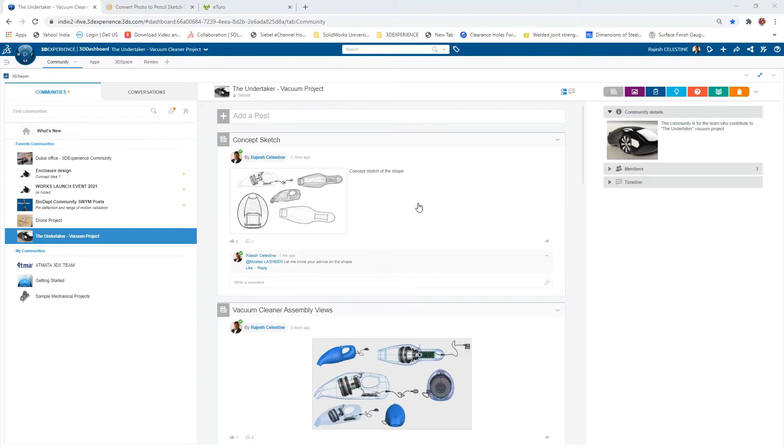Let's see how. Collaboration starts on the 3DEXPERIENCE platform, where I have a dedicated space for collaborating with my projects, my files, and my team. I can also launch SOLIDWORKS from within the platform, so there's no need to use the desktop icon to open SOLIDWORKS. As SOLIDWORKS is integrated with the 3DEXPERIENCE platform, you can directly launch it from within it.

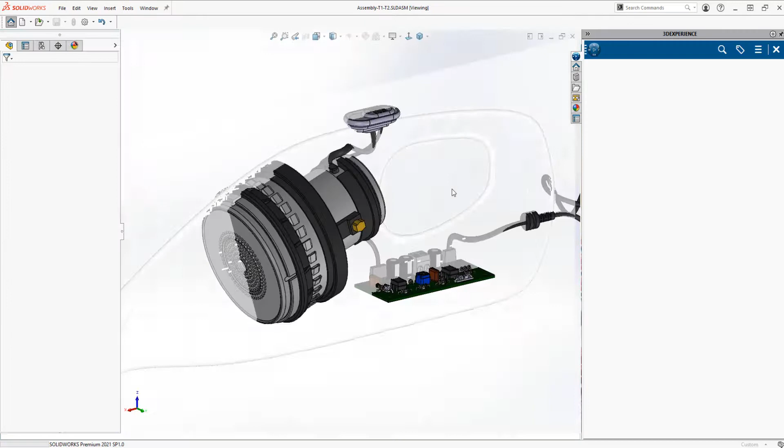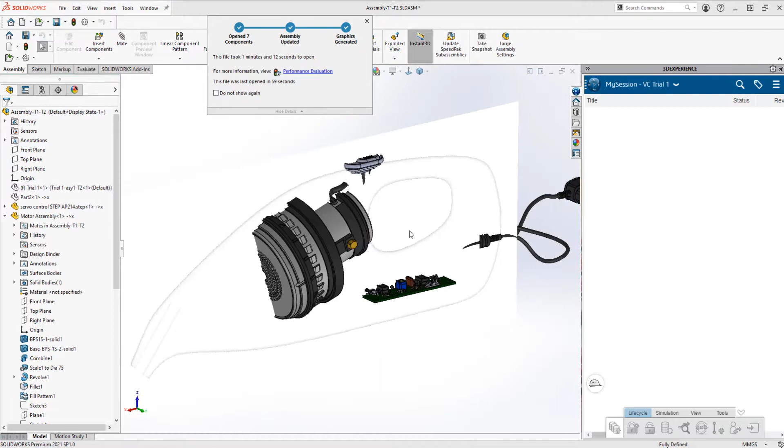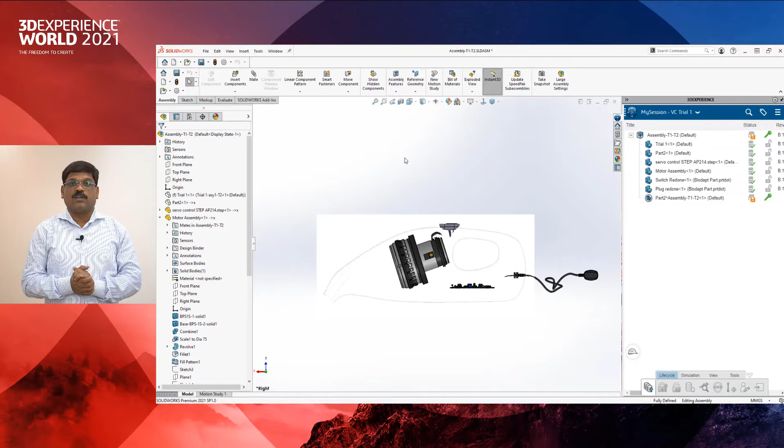We used SOLIDWORKS here as the accessories for the vacuum cleaner were native SOLIDWORKS files. You have a user login ID and password to log onto the 3DEXPERIENCE platform, with a dedicated space to save your files. Every versioning, revisioning, and stage of the design, including ownership, is tracked behind the scenes on the platform. As you can see, I have a sketch which helped me create my layout. This shows seamless integration between SOLIDWORKS and the 3DEXPERIENCE platform.

We have created the concept design and concept sketches, and done the layout of accessories required for the vacuum cleaner. Now it's time to shape our product. As SOLIDWORKS users, surface modeling was really a tedious task, and it was quite difficult to create organic shapes with conventional surface modeling tools. Now, on the 3DEXPERIENCE platform, you have the xShape app to work with sub-D modeling concepts.

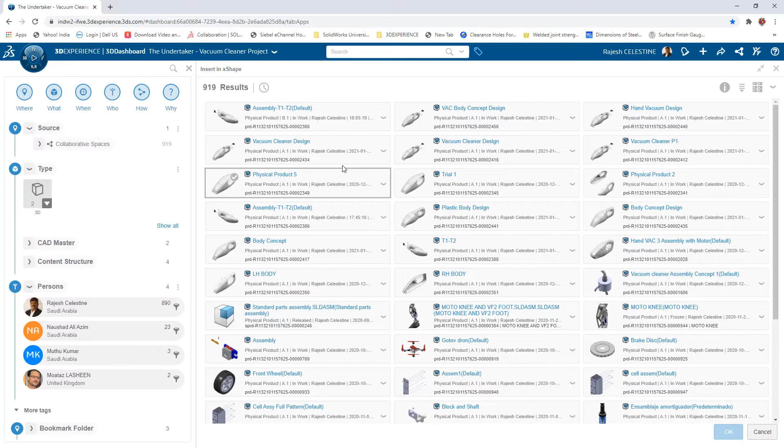Let's see how. First, I start by creating my file, clicking the new component for the vacuum design and putting it in my collaborative space. Then I insert my SOLIDWORKS design layout from my collaborative space into xShape. This is possible because SOLIDWORKS has seamless integration with the 3DEXPERIENCE platform.

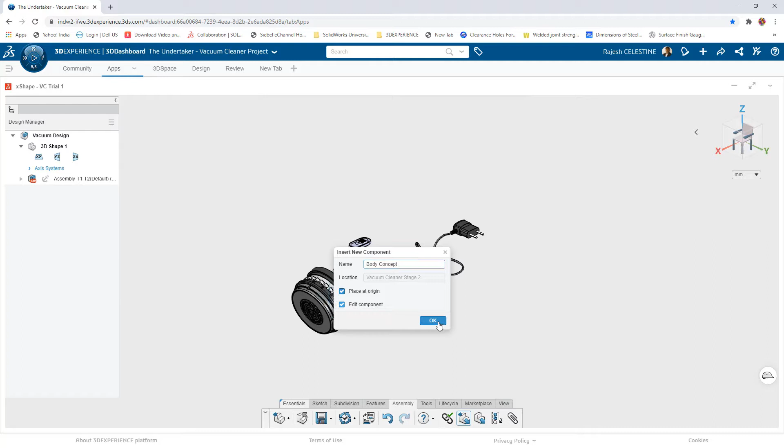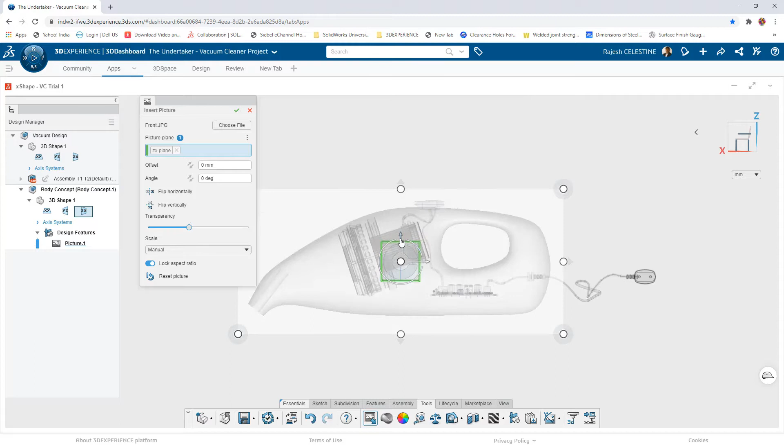The next step is to create a new component at the origin within xShape. Next, I insert my concept sketches, as we usually do with SOLIDWORKS, which will be the reference for shaping my primitive. After inserting the sketch picture, I can change the transparency, adjust, resize, and position it to suit my component layout. This can be done manually or by specifying a distance. Two sketches are sufficient for this design, the front and the top.

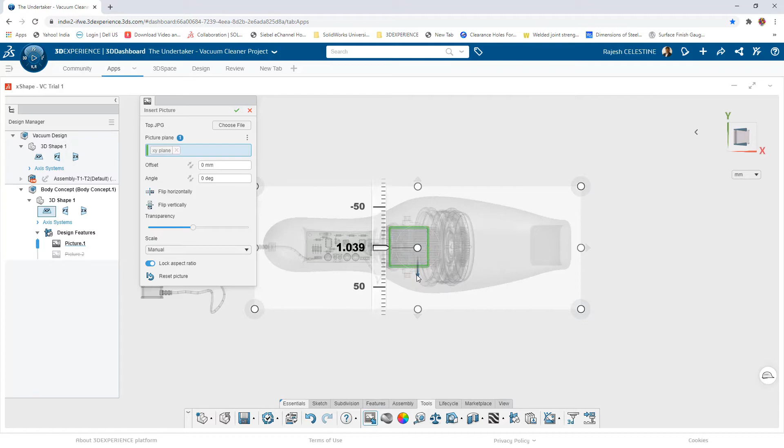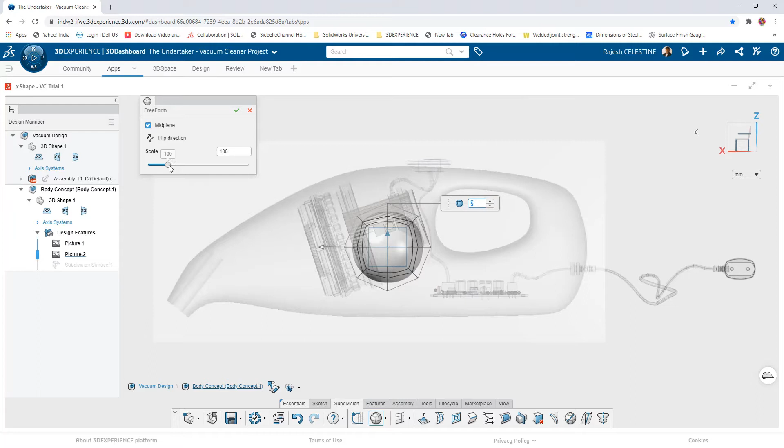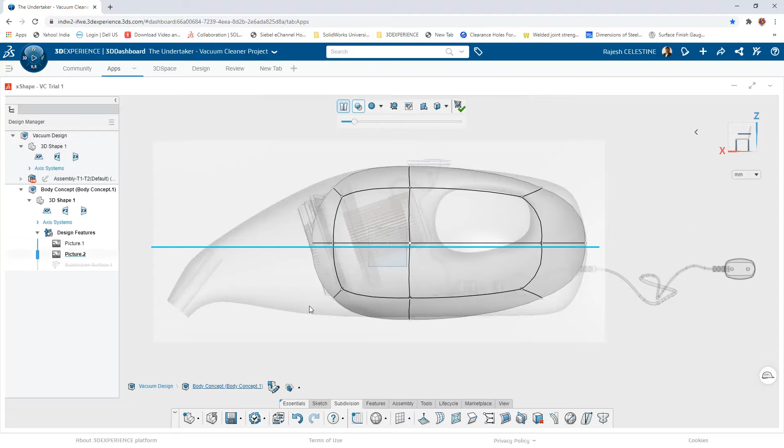In xShape, everything starts with a primitive. From a host of 3D primitives provided within xShape, you can choose the one that best suits your design. For this design, I would choose a quad ball to get started. You can refine your shape by adjusting the number of divisions and dragging the on-screen handles to refine its initial size. xShape preserves curvature continuity across the entire shape, eliminating traditional methods required to solve these challenges. Changing the transparency of the primitive aids in getting a clear view of the sketch.

Additional loops can be inserted and deleted to refine your shape and have greater control on shaping your geometry. You can refine your design through a variety of methods, the simplest of which is to select any number of vertices from the shape and then use the on-screen triad to adjust their position.

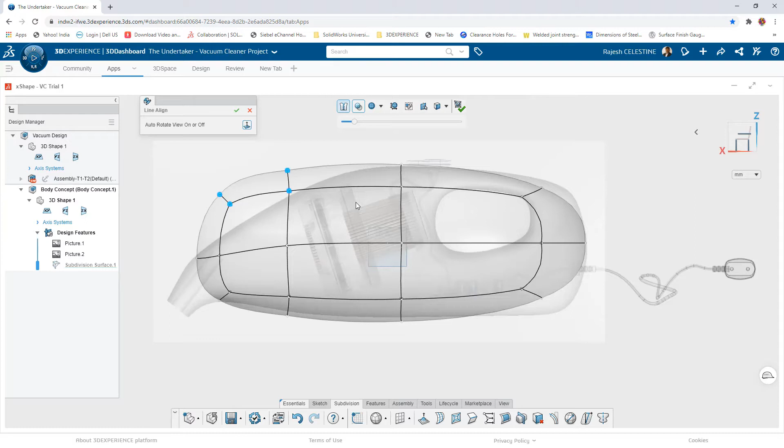Refining your shape can be done by selecting vertices, edges, loops, and faces individually or in groups. The triad, known as the robot, helps you move, rotate, and scale in all 3 directions.

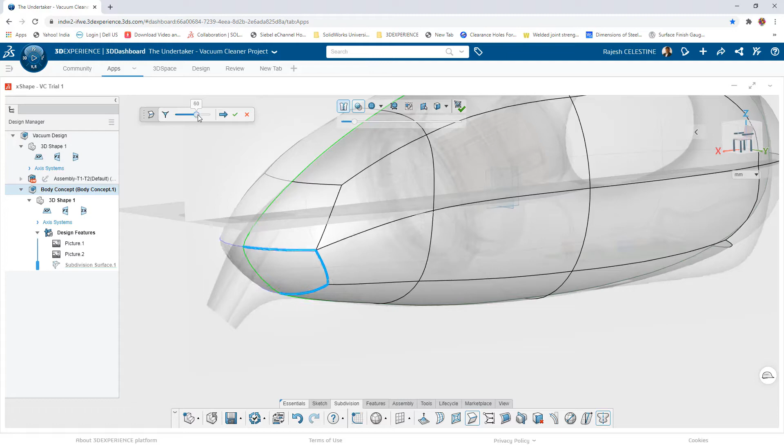Powerful tools like symmetry enable you to define and preserve symmetry across the specified plane. This simplifies the design process by allowing you to focus on one half of your model while ensuring that those changes are preserved on the other half.

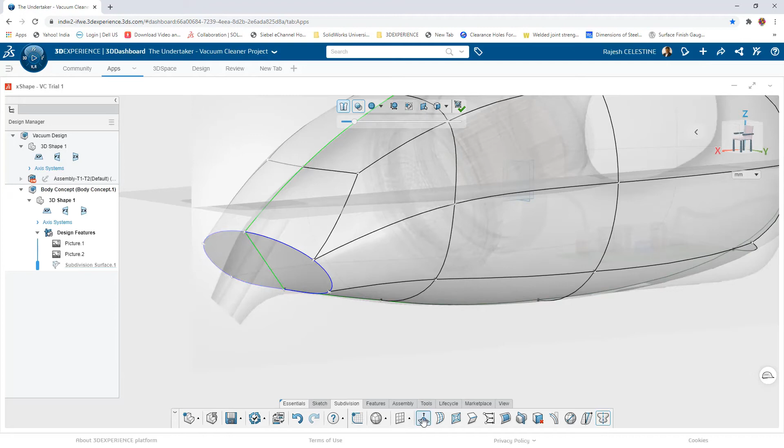The crease feature aids in creating sharp edges where the percentage of sharpness can be adjusted. By selecting a group of vertices, you can choose specific tools suggested by xShape to be applied on your selections. After completing your geometry, you could refine the existing vertices to suit the shape visually.

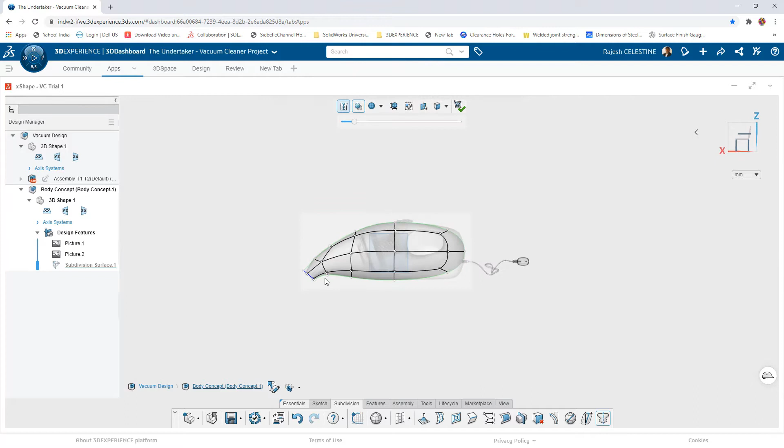Dragging the entities onto the sketch completes my profile on the portion of the suction mouth. Refining my model helps me to complete the portion on the suction mouth. Now having completed the portion of my suction mouth, I would like to refine my geometry on the portion of the handle.

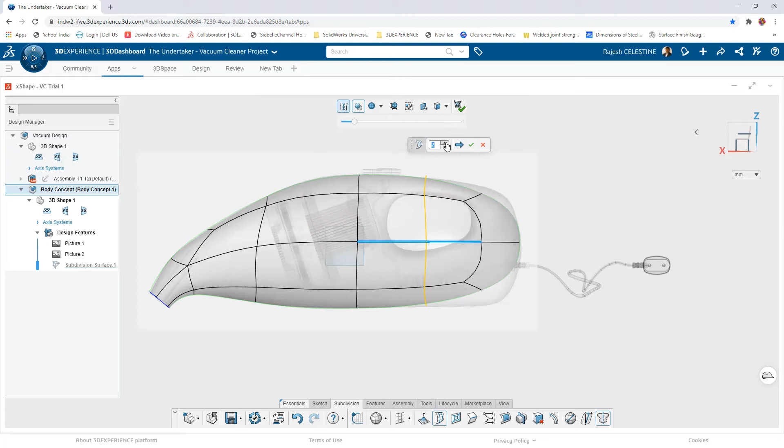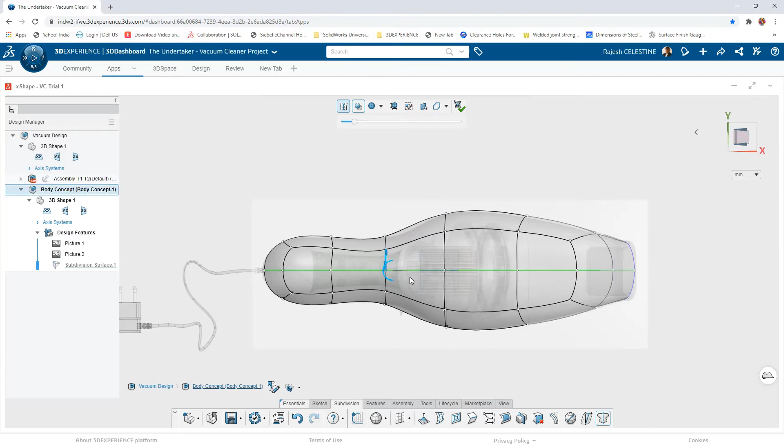Before this, to refine my geometry, I would like to add additional loops and position them in the top view. Just by selecting your vertices and dragging them, and using your filters where you can select edges, loops and vertices, you can position them to get a refined geometry.

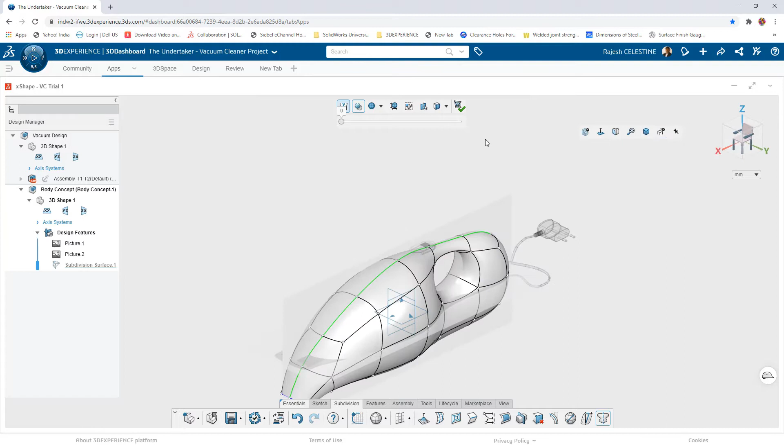Selecting opposite faces and applying the extrude command removes material from the geometry. Once removing material, it's time to refine the portion of my handle where I could insert additional loops, which gives me greater control to refine the geometry.

Having completed this, it now makes it easier for me to shape my vertices to align the shape of the handle and complete my design.

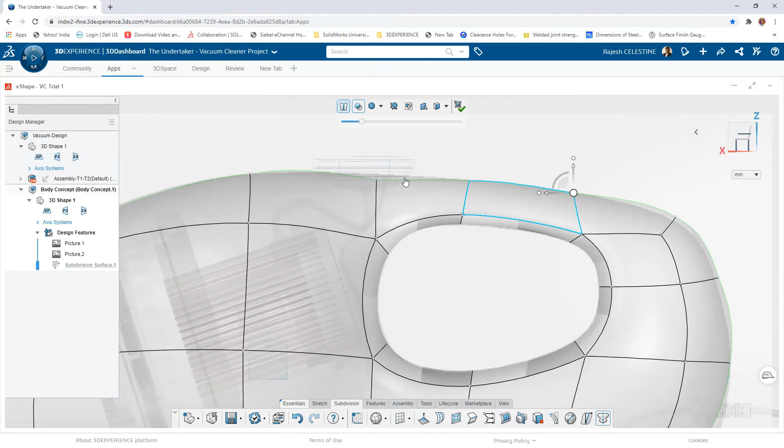Here it is needed to align the bottom vertices as I require them aligned to a line. Selecting the bottom vertices and choosing the line align option helps me achieve this.

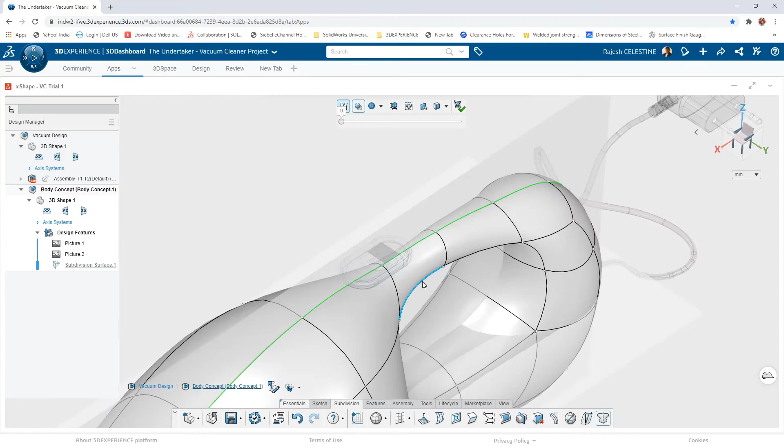A portion of my handle needs to be stretched, where I could select the edge and move it with the triad.

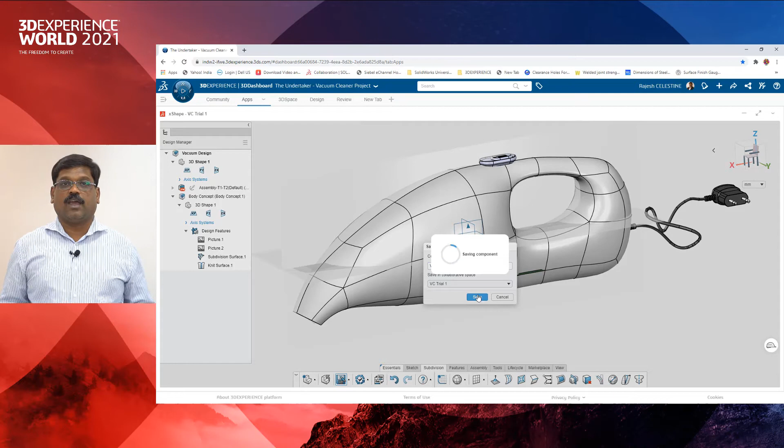So once I've completed my design, it's time to save it to the collaborative space. What we saw here is that xShape is a powerful way of creating complex shapes on the 3DEXPERIENCE platform.

So having created my design, I would like to check for surface continuity and draft analysis. Let me check if I have the necessary drafts, and also whether my assembly is free of interference. So I am going to run an interference detection check. Let's see how it works.

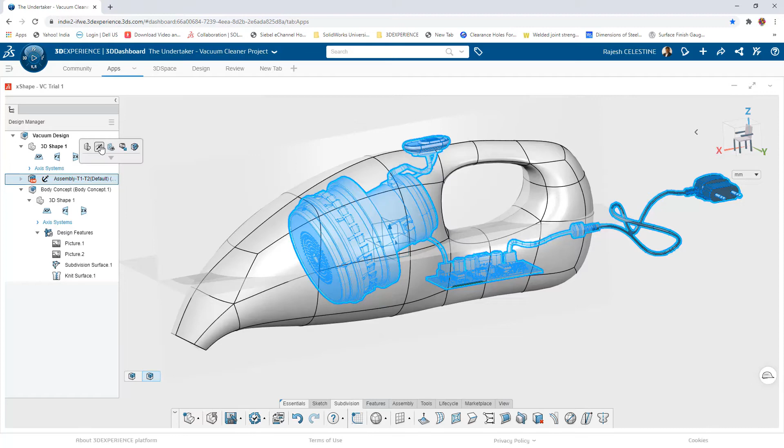Let's start with checking the surface continuity of my geometry. Surface continuity can be analyzed with the zebra stripes feature, just like in SOLIDWORKS. Switching between different views by clicking the view cube gives me a clear visual insight on the surfaces.

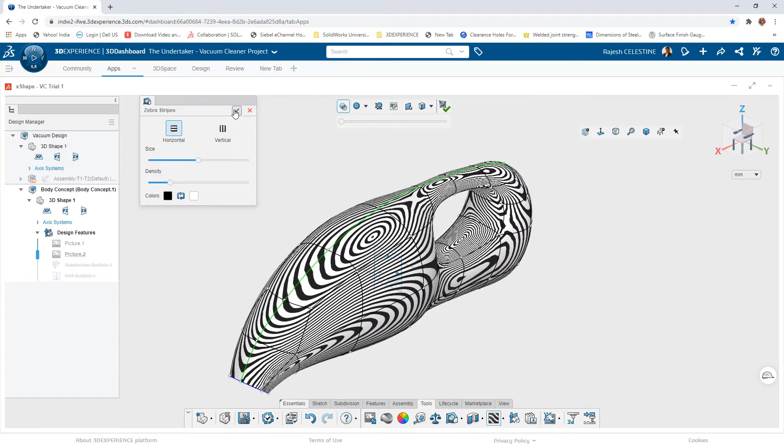Now it's time for me to check the flat faces on this plastic part. Here it is needed to have a draft of 1 degree. The draft analysis feature, similar to SOLIDWORKS, enables me to achieve this. Having my draft analysis active identifies faces that have positive and negative draft, as well as flat faces.

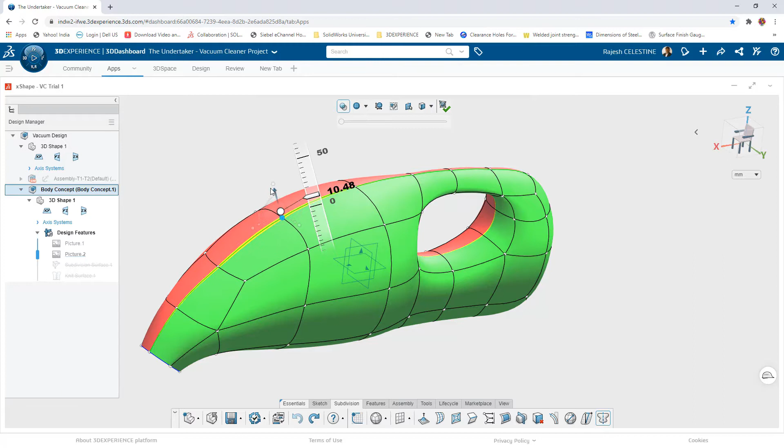The faces colored yellow require draft. I start by editing my subd model and dragging the necessary vertices as required. Now my model is free from flat faces.

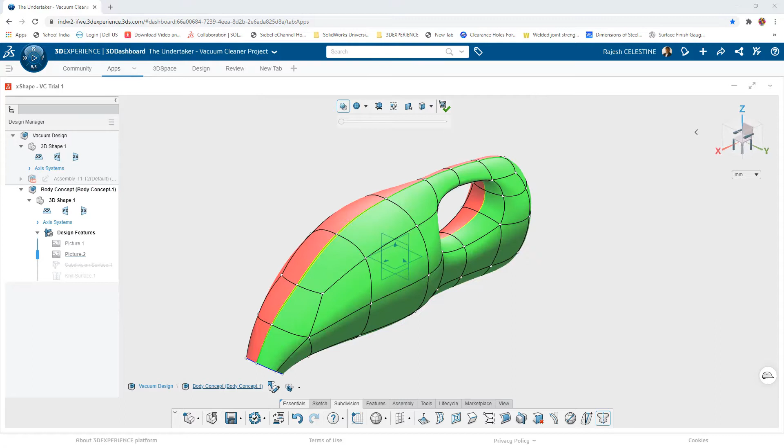Before running an interference detection on my assembly, I would need to shell my geometry. I will be applying the shell feature from within the xDesign app.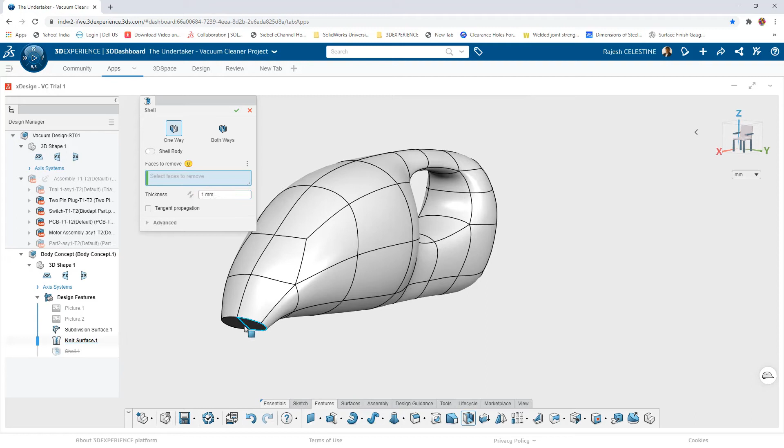Switching between apps is flexible on the 3DEXPERIENCE platform. I click Features, select the shell feature. As with SolidWorks, I select the faces to be removed and define a wall thickness of 1 mm. And it's done.

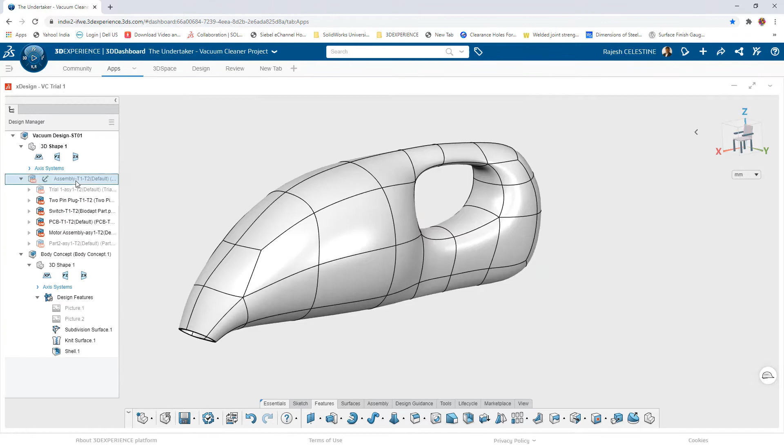After my shelling is complete, next I will proceed to check for interferences in the assembly. I will first activate the top level of the assembly and then run the interference detection tool. Selecting bodies in scope and hitting the calculate button shows me the interferences of bodies in the assembly.

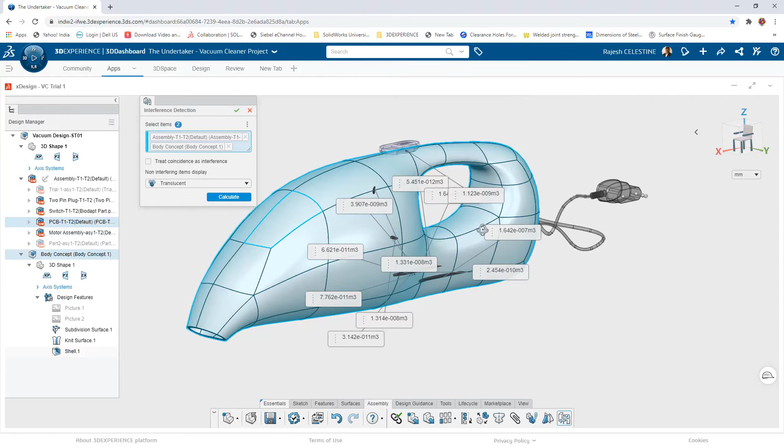I see the interferences between the PCB and the body, which is a matter of concern. The edge of the shape requires to be moved.

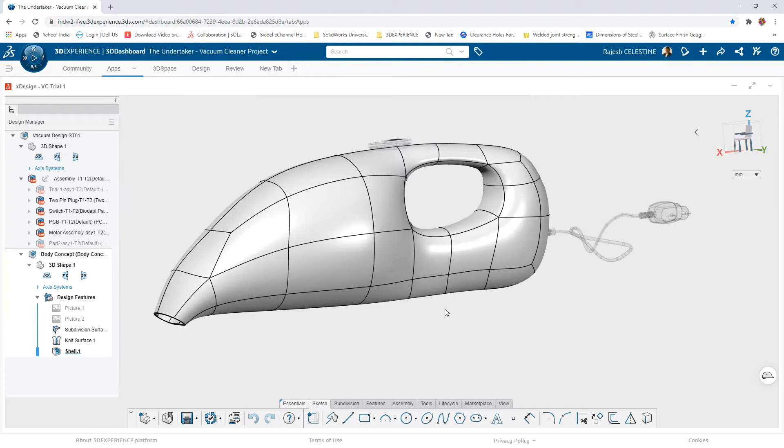Picking the geometry and selecting edit part activates the part. Next, clicking on the face again gives me a smooth transition into xShape. Now with the help of the triad, I can move the edge to make it free from interfering with the circuit board.

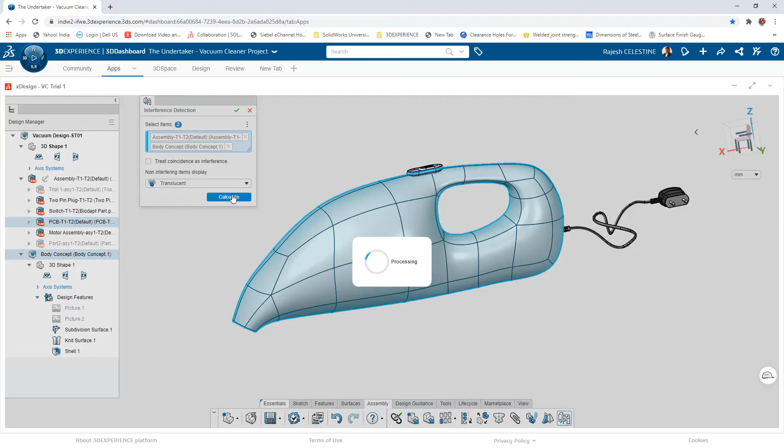After completing my editing with the shape, I can again run my interference detection by selecting bodies in scope and hitting the calculate button. Now I see the assembly is free from interferences. The interference shown can be ignored as it is to do with the wire.

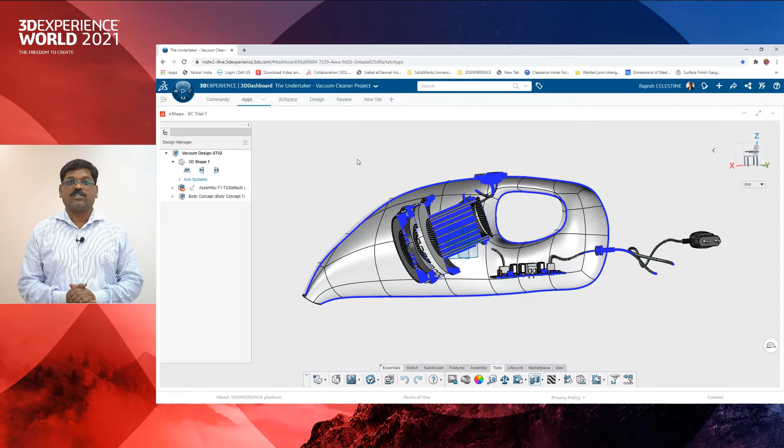I can apply a temporary section view, as we have with SolidWorks, to view or visualize the internal components of my assembly. What we saw here is validation tools such as zebra analysis, draft analysis, and interference detection, which are powerful tools on the 3DEXPERIENCE platform to validate your design prior to manufacturing.

3DEXPERIENCE takes care of the files created in their native formats, whether xShape or xDesign. To complete my design, I will need to add additional features to the plastic part. So here I am going to add some bosses to connect the parts. After adding my bosses, I am going to split my bodies using the multi-body technique.

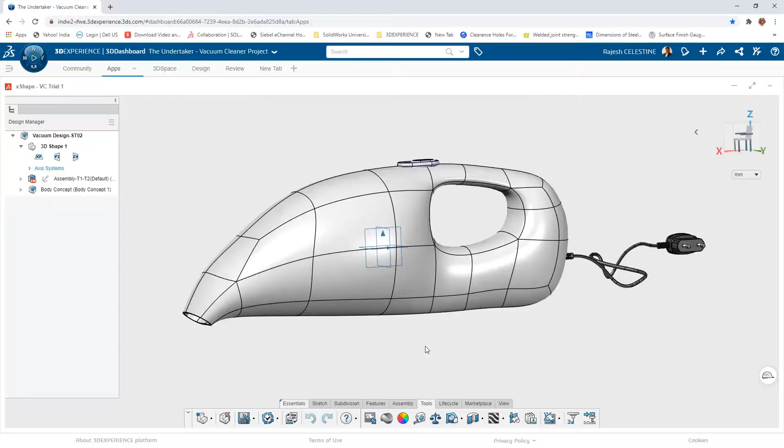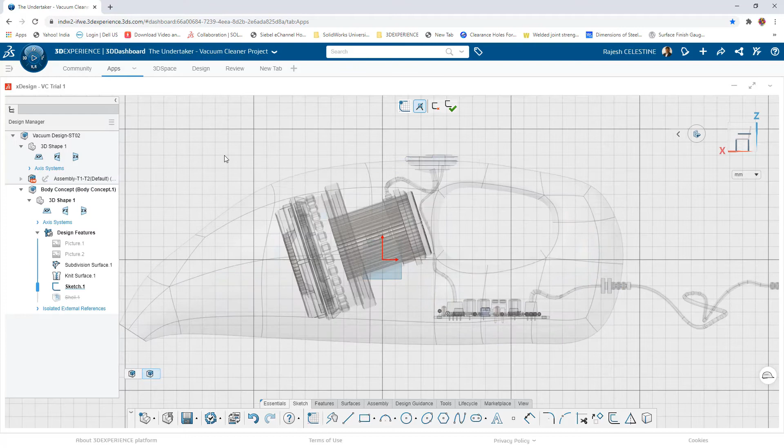Let's see how. Here I am going to split the geometry using the xDesign app. I can reorder features by moving the rollback bar. In this case, it is necessary to add the bosses before the shell. I start by creating the profiles needed for the boss. Making the part translucent helps me place my sketch profiles in context with the assembly.

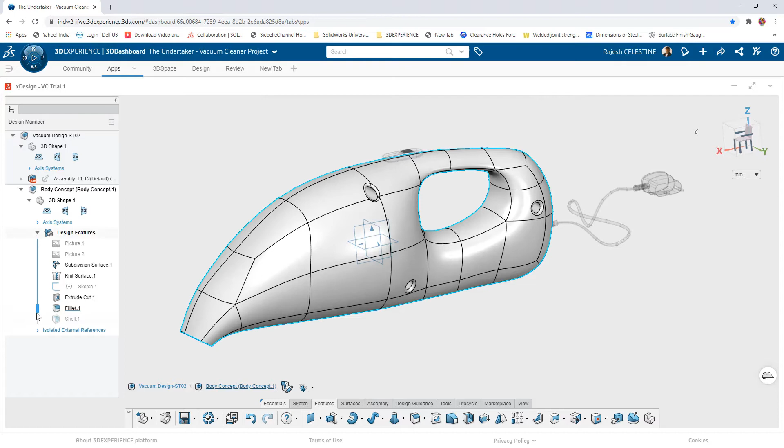After completing, I apply the extrude feature to remove material from the geometry. Applying a radius of 2 mm on the edges of the boss completes it. Now drag the rollback bar to activate the shell feature.

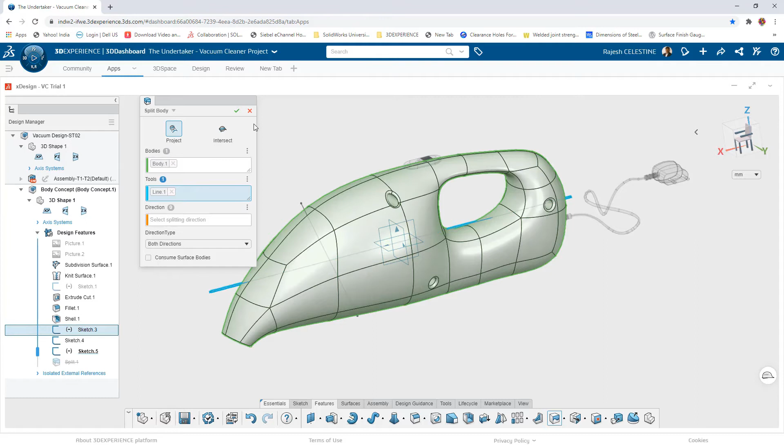Let me now proceed to split the bodies. I have already created a sketch which acts as a trimming tool for the split. Go to Features and select the Split command. Select the bodies to be split. Pick your splitting tool, which is the line, and click OK. Now my body is being split into the left hand version and the right hand version.

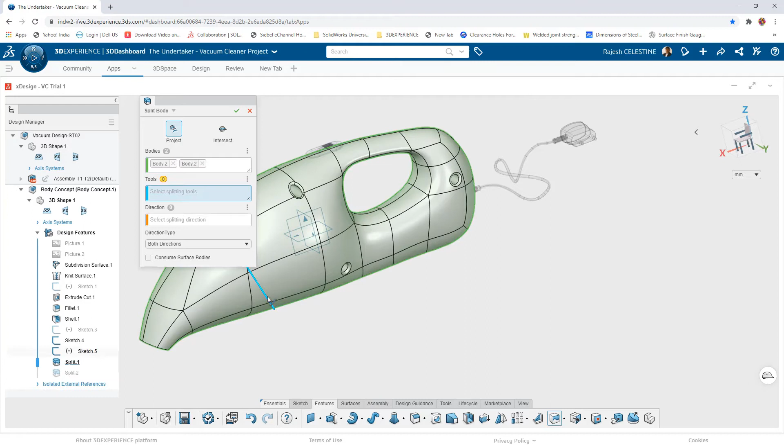Let me, in a similar way, split the suction mouth. Select the split body tool, pick both bodies, and pick your cutting line. Say OK, and it's done.

Now I will need to combine the left hand side and the right hand side of the suction mouth. So I use the combine option. With the option selected add, click OK. This combines my suction mouth.

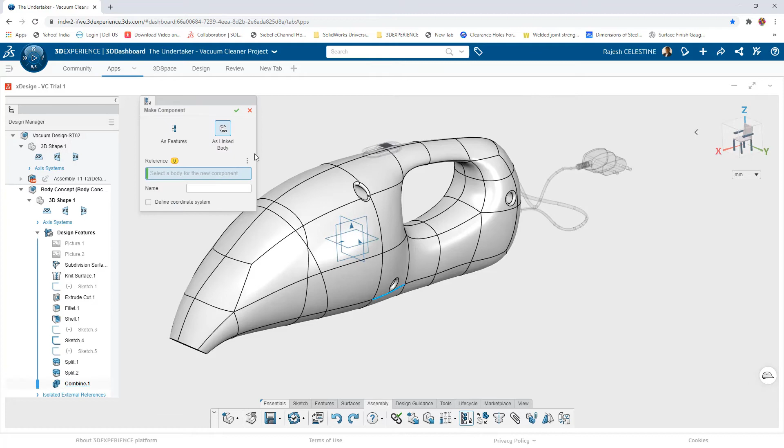After creating my body, now it's time to save my bodies as separate parts. This is achieved by the make feature component, which maintains the link with the parent body.

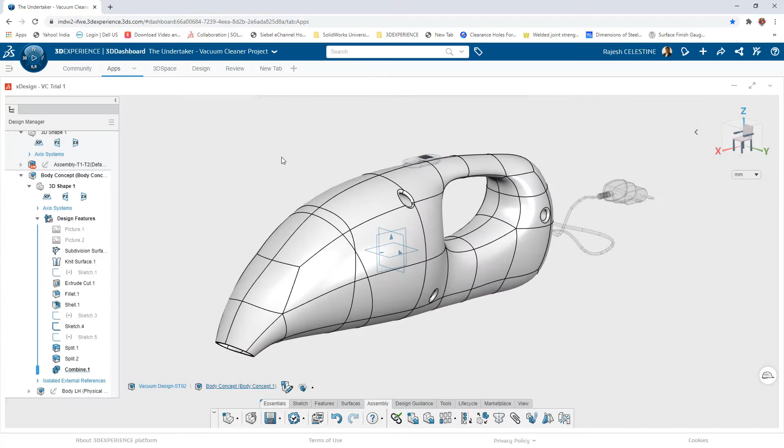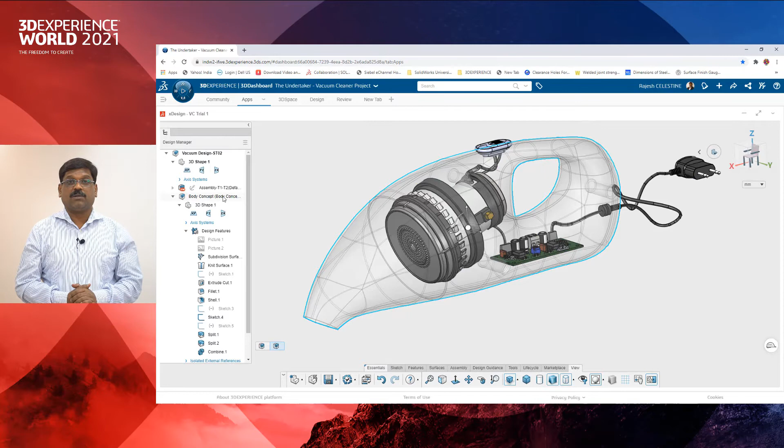In a similar way, I am going to create the component for the right hand part, and also for the mouth. Using the isolate command helps me view individual parts. From this, we see that features can be reordered to achieve design intent. The multi-body technique is a powerful way to complete your design.

Thank you, Rajesh. You did a great job.

It's my turn now to complete the design by adding more details. And what I'm going to do is add this small clamp.

And to do that, maybe you are in a lockdown or you are not able to get into your desktop computer to access SOLIDWORKS. So all of your data should be accessible from anywhere. And this is exactly what I'm going to do.

I will be using one of the roles inside 3DEXPERIENCE, which is the Sheet Metal Creator role. Inside this role, I will find xSheet Metal. Believe me, if you are familiar with sheet metal design, this simple clamp is not so simple. So let's see how we can use xSheet Metal to design the part.

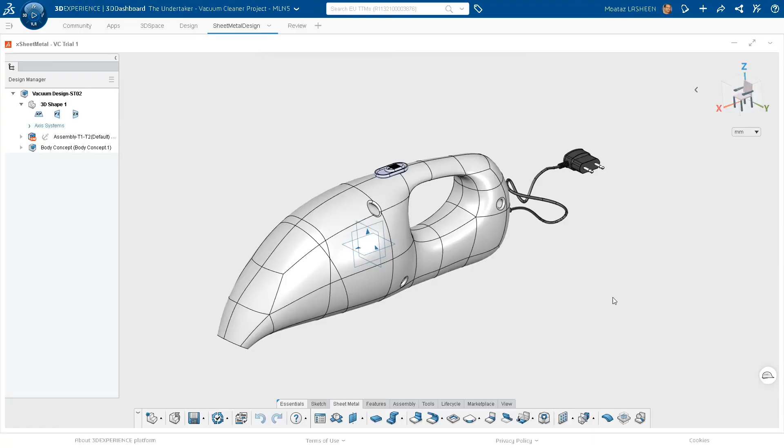I'm going to use exactly the same assembly that Rajesh did, and from there I will be inserting my own clamp part. Remember, I'm inside xSheet Metal. So I'm hiding the body just to make sure I can access my motor.

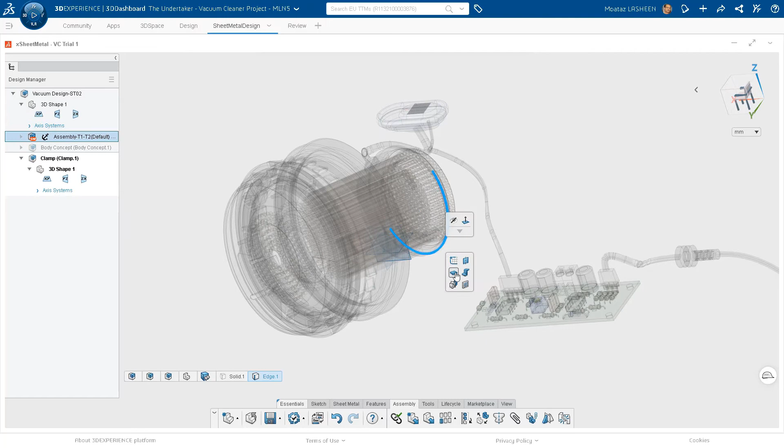The clamping would be for the motor, and that's why I have to reuse some of the edges from the motor to create my reference plane. Here we go. We are making a very good design concept by using the top-down assembly concept, creating the plane on the edge, and using the edge convert to entities, then using that resultant circle to create my sketch. I don't need the whole circle, so I will trim the unwanted piece of the circle

to keep only the arc. And then I always keep my design intent by adding dimensions. So I will add dimension here.

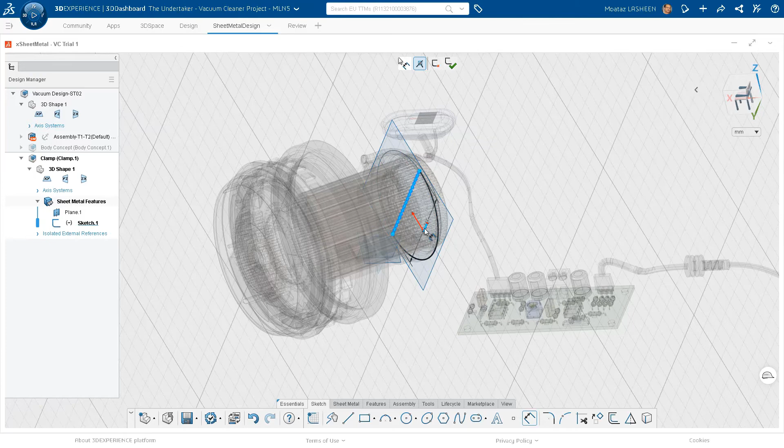To start with the sheet metal feature, first I have to define my sheet metal parameters. I go to the sheet metal parameters, defining the thickness, the bend radius, the K factor, and even the relief type. This is one way to start the sheet metal design in xSheet Metal, by the extrusion feature. Here I'm defining in both directions: 2 mm in the right direction, 4 mm in the left direction. Now it's time to create a swept flange.

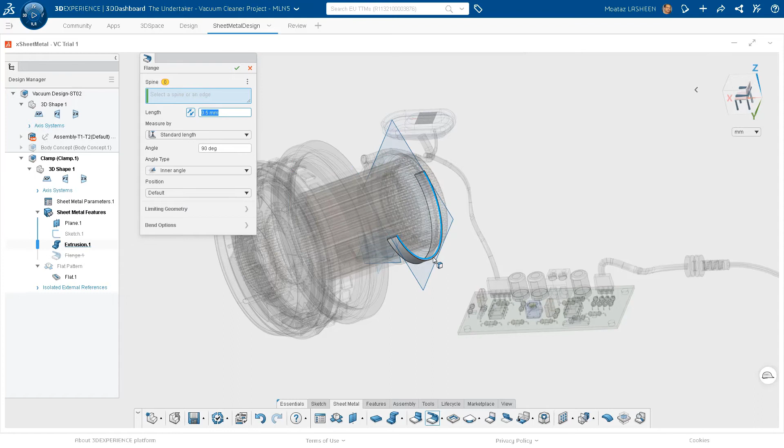Actually, this is not a normal flange because it can create an edge flange over the circular edge. And of course, I will not be using the same default bend radius. I'm going to change that in the swept flange feature. So how can I keep going with the swept flange?

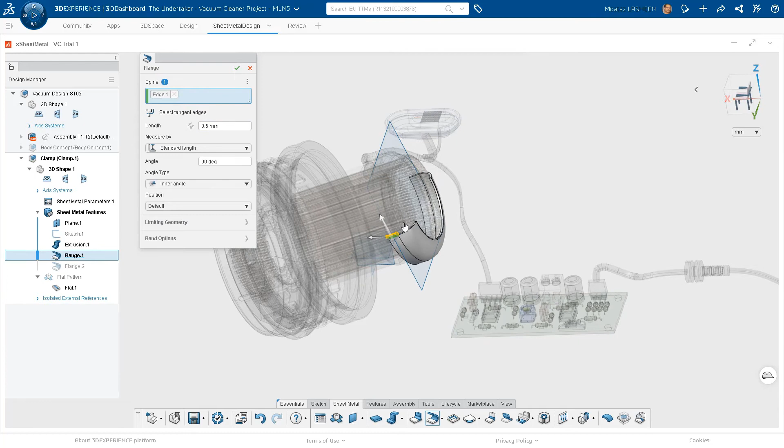For that, I will be selecting one of the sides of my clamp, and xSheet Metal did a great job selecting all the tangent edges. Let me repeat that: first I will hide the plane just to see the other side of the clamp, and then I will select the swept flange. Again, I can reverse the direction, and here we go. We are done.

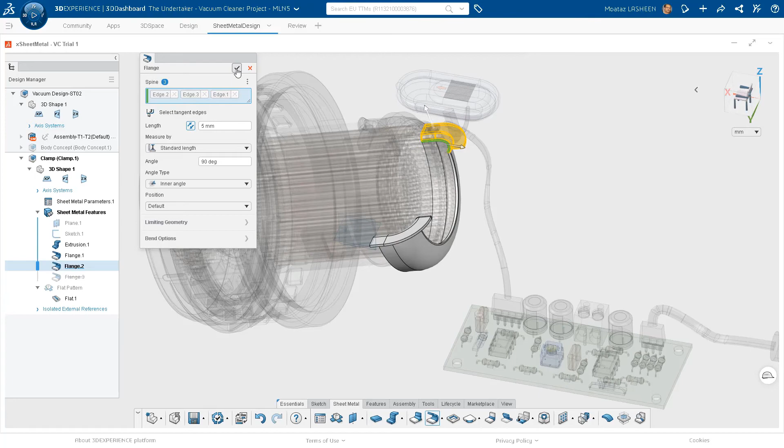So one more thing I need to add to my sheet metal part is the fillet of the corners. To fillet these corners, I'm using the machine learning inside all the X apps in the 3DEXPERIENCE platform, which enables you to select multiple edges at once.

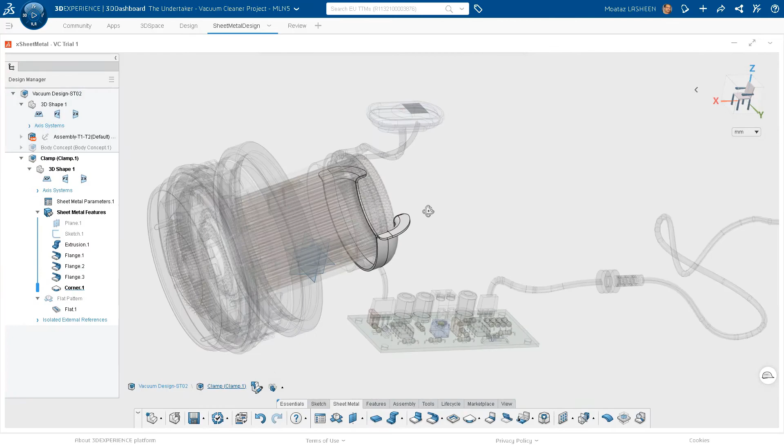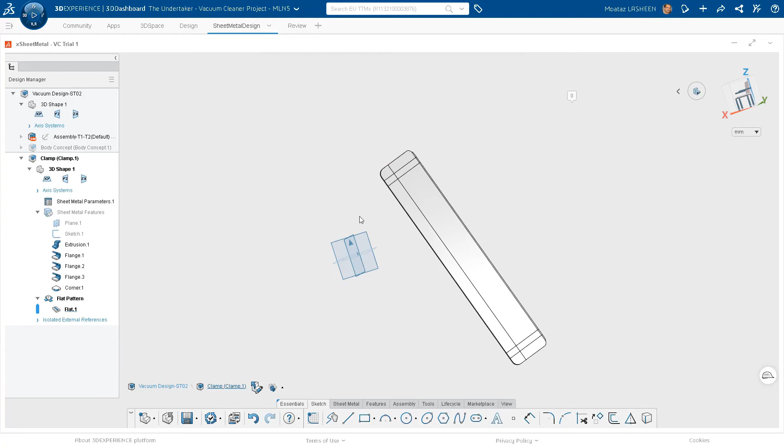It looks great, everything is fine, but I still need to show all the components. Before showing all the components, I need to examine the flat pattern. I can go to the Feature Manager Design tree, or select my sheet metal component and access the flyout toolbar to get the folded state or the flattened pattern of my part.

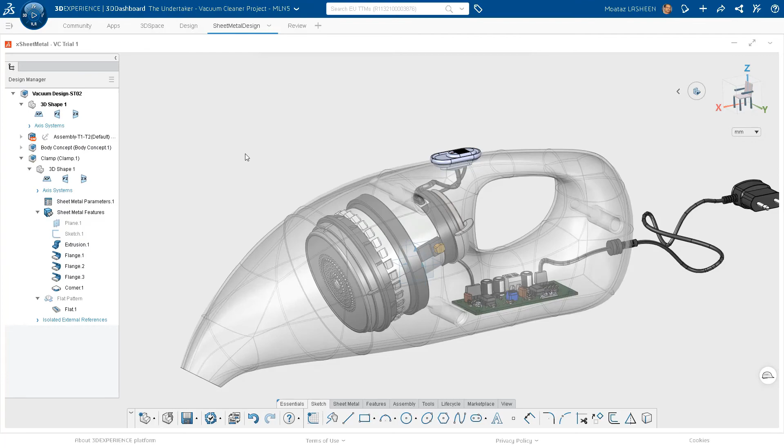All done. I need to show the body to make sure it's not going to interfere with the other components, as Rajesh showed us that we can do some interference detection. But I think all is good here.

I'm almost done. We have seen xDesign and xShape before. Now I introduce to you xSheet Metal, which gives you the capability to do all the sheet metal design on the cloud, collaborating with your team members.

We completed almost all of the designs, and remember that all of the design is in the 3DEXPERIENCE platform. What we need to do in the next stage is use SOLIDWORKS to create a drawing.

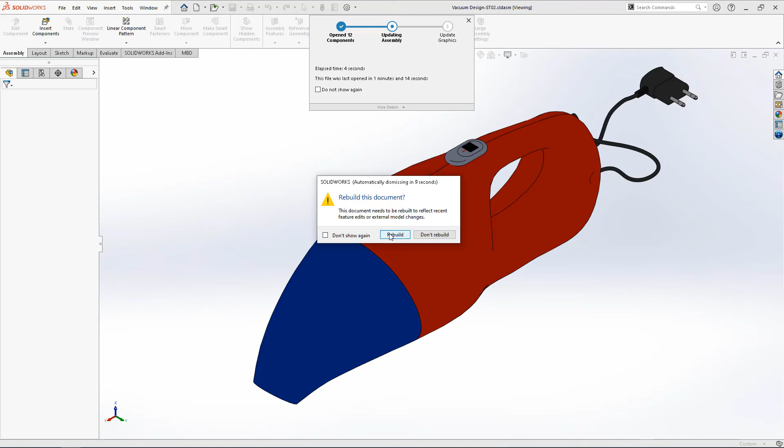Let's see how. As we are collaborating in the same collaborative space in the 3DEXPERIENCE platform, if I would like to open that in SOLIDWORKS, again it's simple drag and drop from the 3DEXPERIENCE platform into the SOLIDWORKS user interface.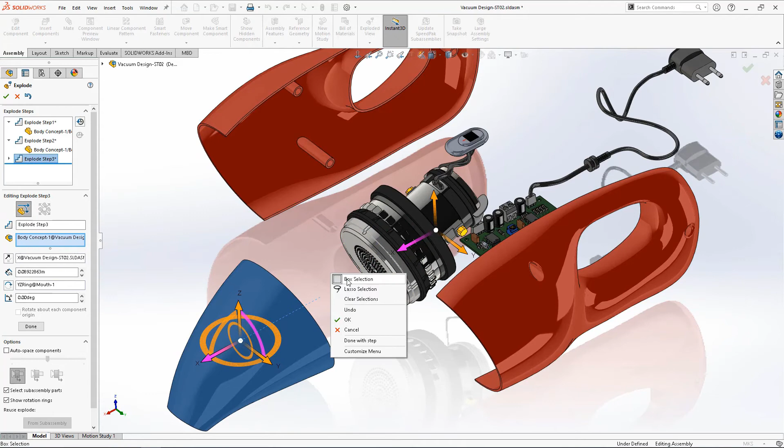Before going to the drawing, I would like first to create a nice exploded view to show all of the work that has been done, to show the left hand, the right hand, the mouth section, and also the clamp. So the mounting clamp is there.

I can see all of them. Very nice view to be represented in the drawing. As usual, I'm using the normal tool to make a drawing from assembly, selecting my template.

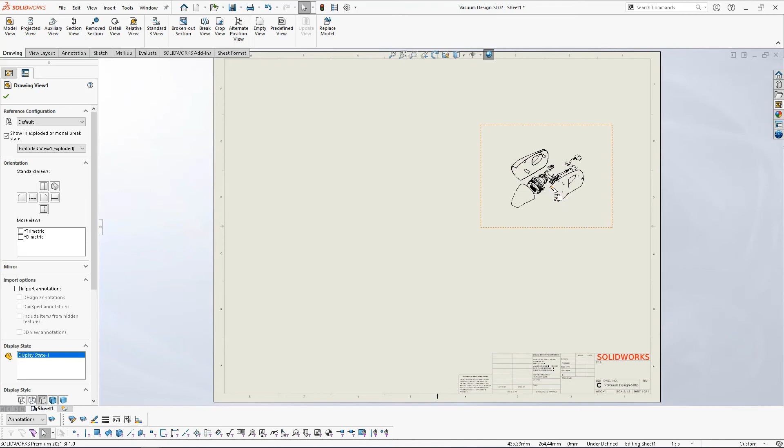Here we are. The first view that I will start with is the exploded view, drag and drop in SOLIDWORKS, and then changing the scale. And of course I need to change the display state of my view here.

I would also like to add more views, like the right view and the top view. So drag and drop will do the job.

Let's add some dimensions, just arranging the views and adding dimensions to show the overall dimension of the vacuum cleaner. It's not necessary to show all of the dimensions here. I'm just showing you that we can add all the dimensions necessary.

But the most important thing is to add the bill of material. That's why I'm using my own template to create the bill of material for all the components represented in that assembly, the vacuum cleaner. And again, it's very important to add the balloons.

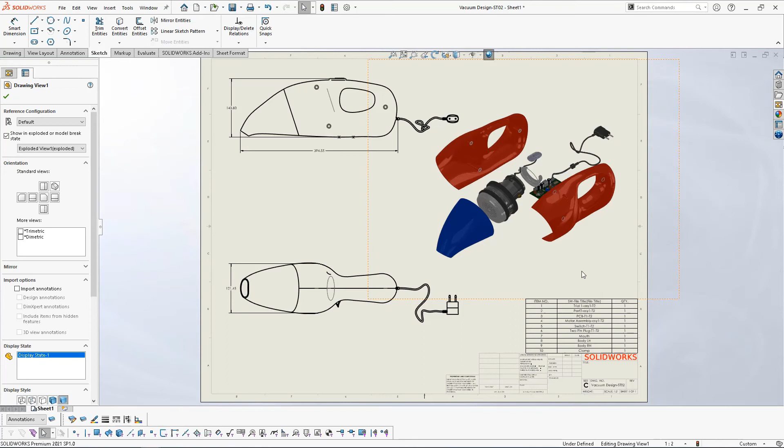Almost done. The final step is to upload all of these nice drawings to all my team members, specifically Rajesh, so he can see the final drawings of all our work. Within the connector capabilities between SOLIDWORKS and the 3DEXPERIENCE platform, it's just about saving everything on the cloud.

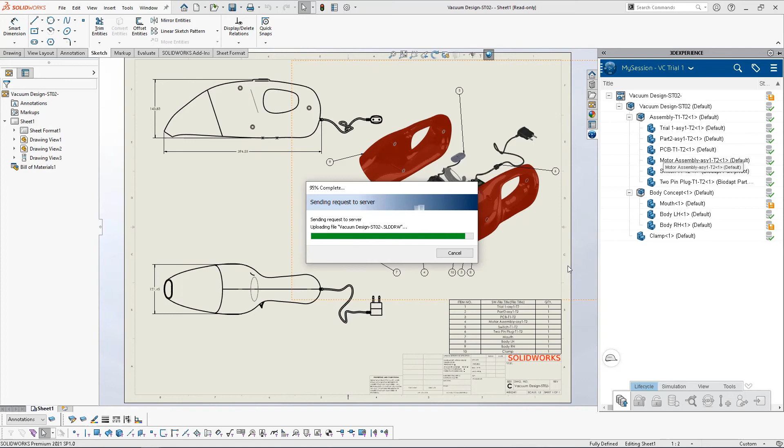And we are done. So what we have done so far: we started from a concept design, creating all of the components initially in SOLIDWORKS, stored in the 3DEXPERIENCE platform, bringing them all together into SOLIDWORKS. And from there, we have been using xShape.

xShape is included in the 3D Sculptor role in the 3DEXPERIENCE platform. I can call this advanced surface modeling for us as SOLIDWORKS users. And from there, we have been able to create the organic shape using sub-D modeling.

Not only that, we then went to xDesign, which included the 3D Creator role, and we were able to create the necessary parametric features. Not only that, we have also seen how we can create multi-body inside the 3DEXPERIENCE platform.

And we extended this capability to create some sheet metal features using xSheet Metal, which is included in the Sheet Metal Creator role. And then we brought all of them together back into SOLIDWORKS to create the manufacturing drawings.

Remember, this is only one concept. It's our concept. With the 3DEXPERIENCE platform, you can create your own concept.